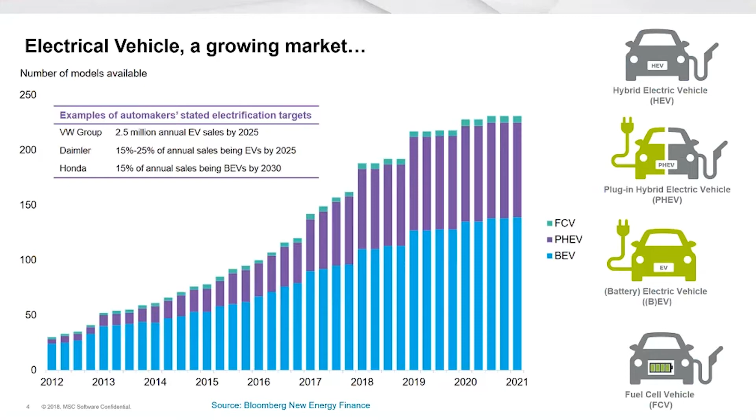Since 2012, the electrical vehicle market is a growing one. Different electrical vehicle technologies are present, from hybrid electric vehicles (HEV) to fuel cell vehicles (FCV). But according to projections, BEV and PHEV will be the dominant technologies in the coming years.

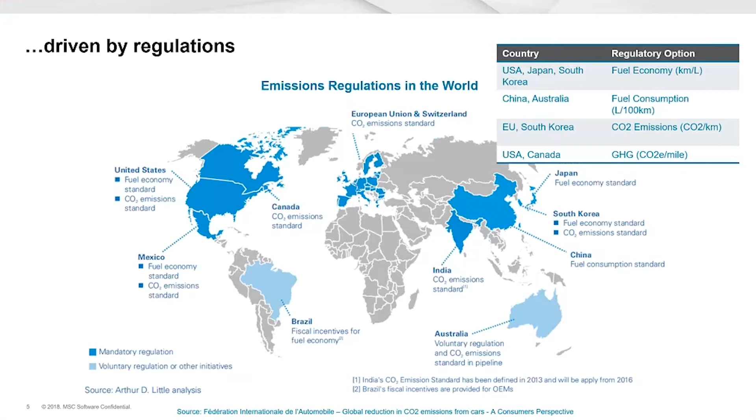This growth is actually driven by regulations. All major automotive markets in the world have emissions regulations in place. These regulations are diverse depending on the country, but all aim at reducing CO2 emissions and improving fuel economy. For instance, looking at the European CO2 Regulation, 2020 will mark the entrance of a new CO2 regulation, and the target will be joined by an excess emission premium for manufacturers failing to meet it.

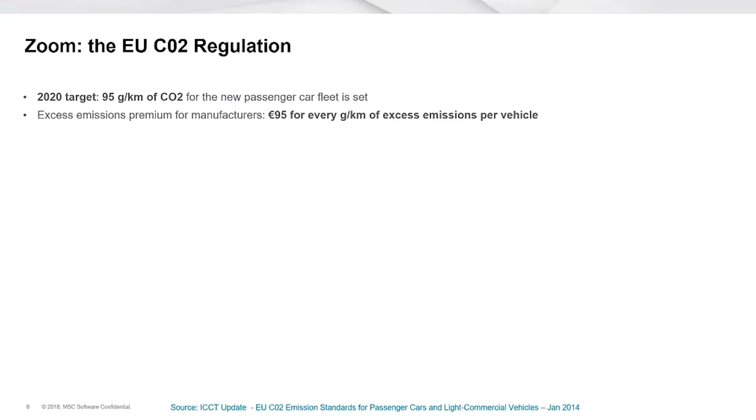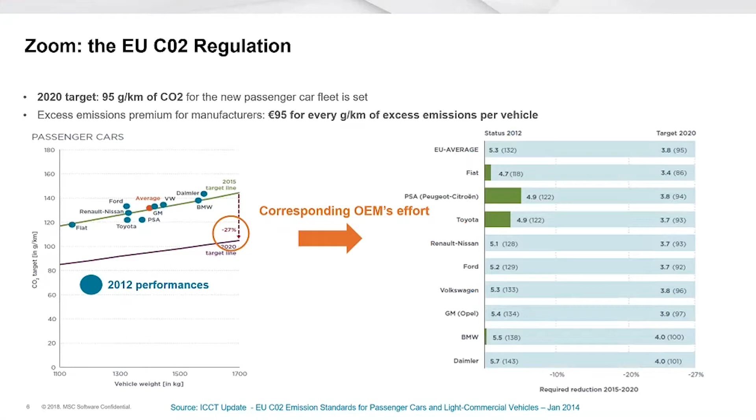Looking at the different emissions performances, the 2020 regulation is asking for a 27% emissions reduction from all OEMs. This will lead to more or less significant efforts for each of them. In order to achieve this reduction, electrification is needed, explaining the electrical vehicle growth we previously saw.

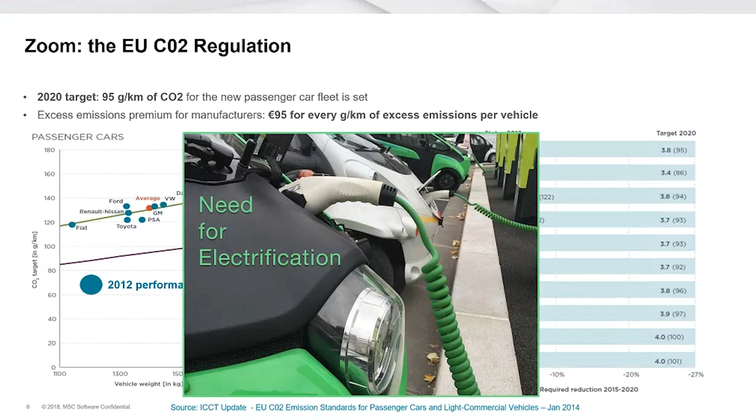But the question now is, what are the NVH challenges related to this growth? To understand that, let's look at the total interior noise of an internal combustion engine.

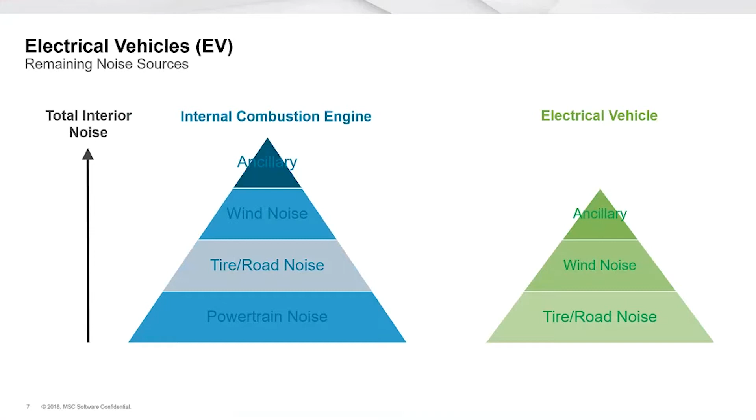We know it's the sum of powertrain noise, tire and road noise, wind noise, and auxiliary devices noise. Now, if we look at electrical vehicle noise sources, the removal of the powertrain noise will, by definition, reduce the amount of noise sources, and as a consequence, make electrical vehicles quieter.

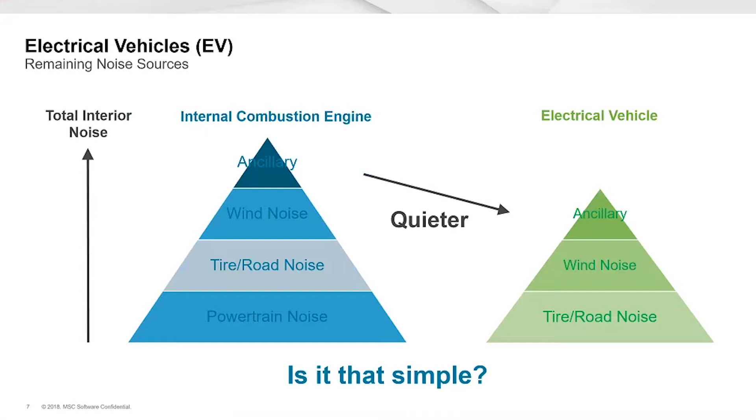But is it that simple? Can we, as NVH engineers, rely on this simple statement? The answer is no. Despite the removal of one of the main noise sources in cars, there are numerous remaining NVH challenges to tackle.

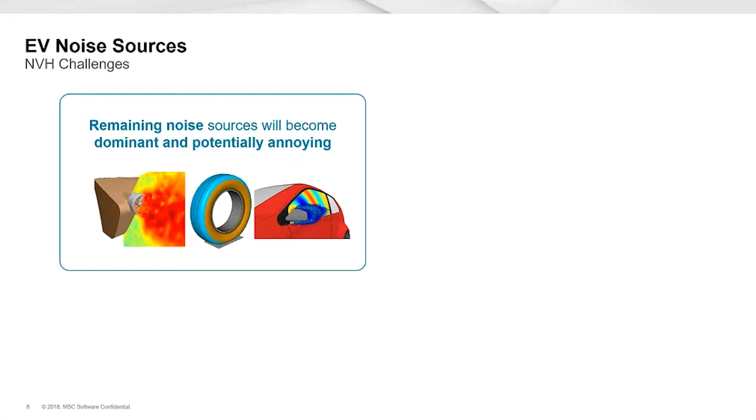The very first one concerns the remaining noise sources that are no longer hidden and dominant, and that will potentially annoy the driver experience. We must also add the electric powertrain noise that needs to be considered.

Usually, EV vehicles are perceived as high-tech vehicles, increasing passengers' sound quality expectations. And finally, if we look at exterior noise, having a total noise level that is decreased can impact pedestrian security, making electrical cars a potential threat.

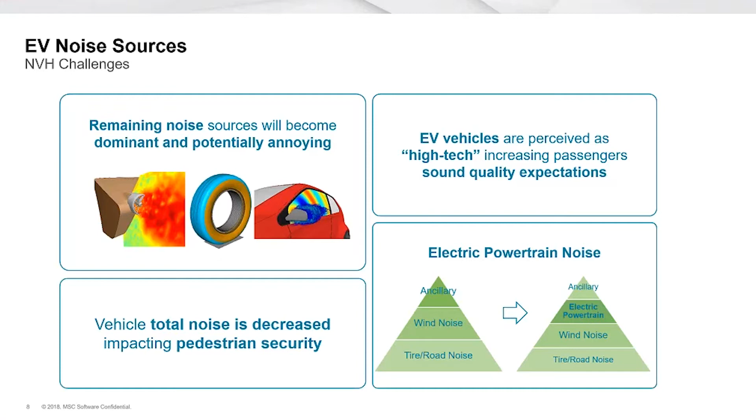This creates a varied and complex landscape that NVH engineers have to tackle. Generally speaking, we can consider two ways of dealing with NVH issues. When customers complain about noise, engineers have to work as surgeons and quickly fix the problem on an existing product. Of course, avoiding the acoustic issue beforehand would be better, and this is an advantage of integrating NVH analysis during the development process.

In this way, simulation can offer solutions with obvious advantages. We can know the noise level before prototyping. We can easily integrate results from other calculations in our simulation. And in the end, we better understand the physical phenomena.

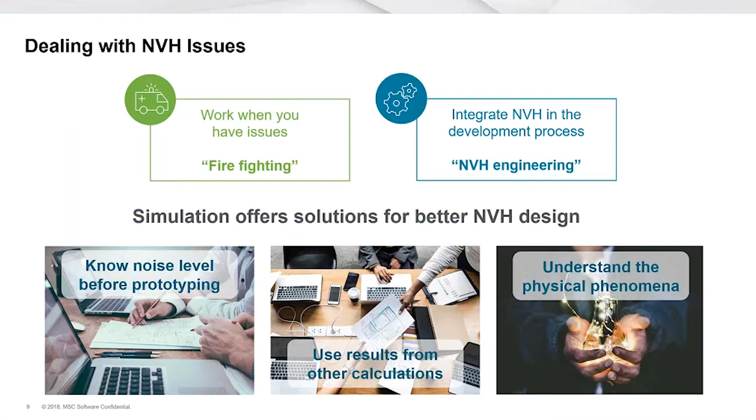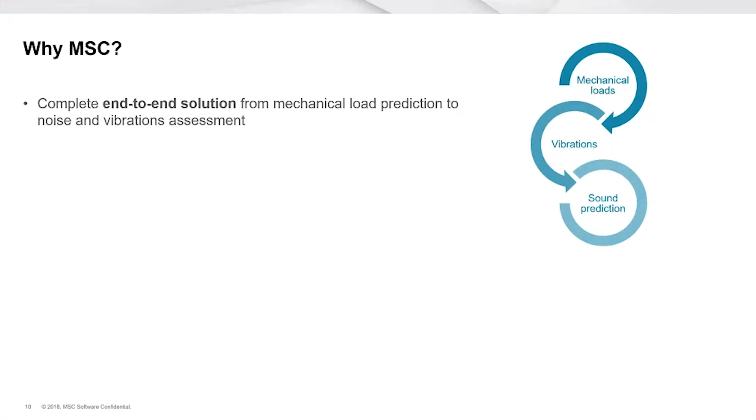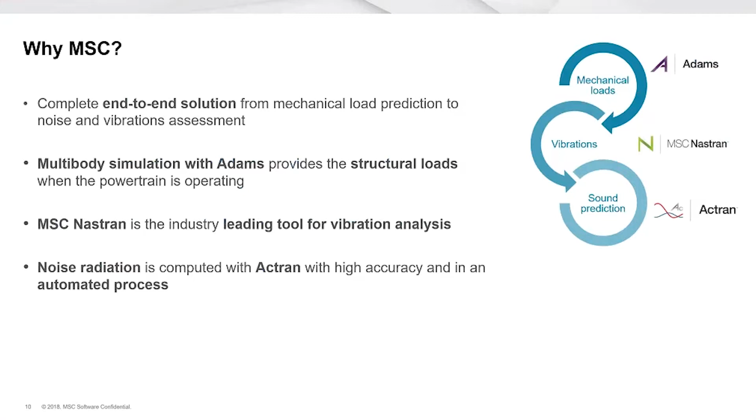Actually, MSC Software provides a complete end-to-end solution to address these problems. Multi-body simulation with ADAMS can provide you with the structural loads when the powertrain is operating. MSC Nastran is the industry-leading tool for vibration analysis, and Actran can accurately and efficiently compute the noise radiation. Finally, electromagnetic simulation results from various software can be easily integrated with MSC tools for electric motor noise prediction.

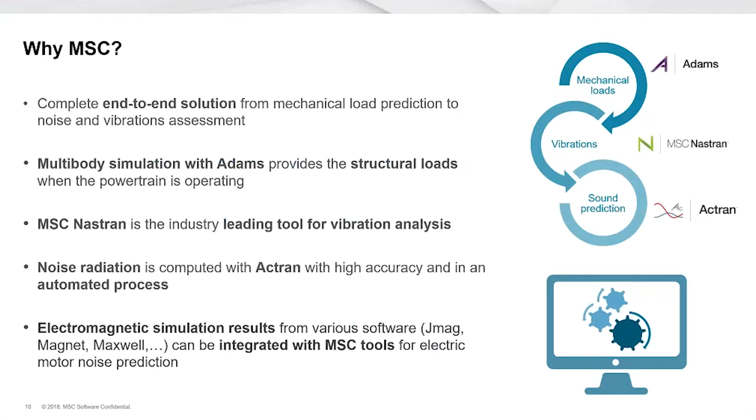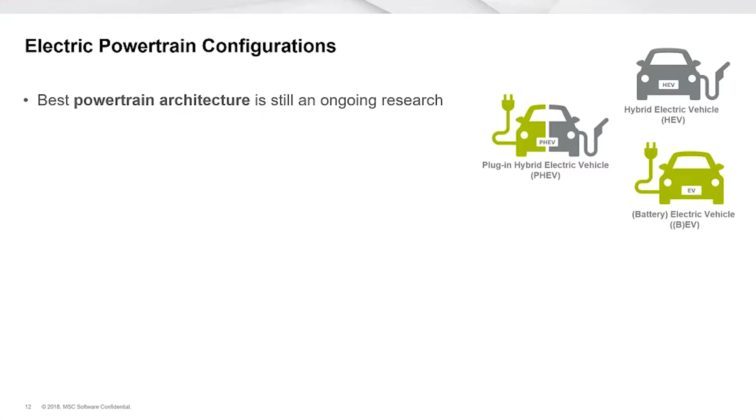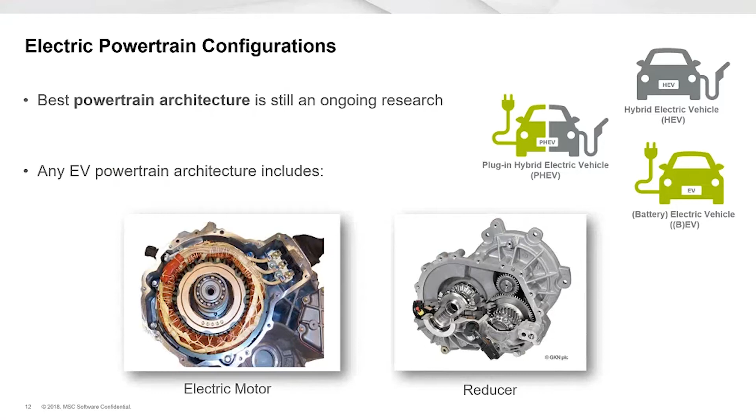Now let's better understand how the MSC software solutions can be used for electric powertrain noise simulation. There are different technologies for electrical powertrains, but whatever the architecture, any electrical vehicle powertrain includes an electric motor and a reducer. The gear reducer and transmission noise can be efficiently studied using MSC Nastran, ADAMS, and Actran, while electric motor noise can be studied using MSC Nastran and Actran.

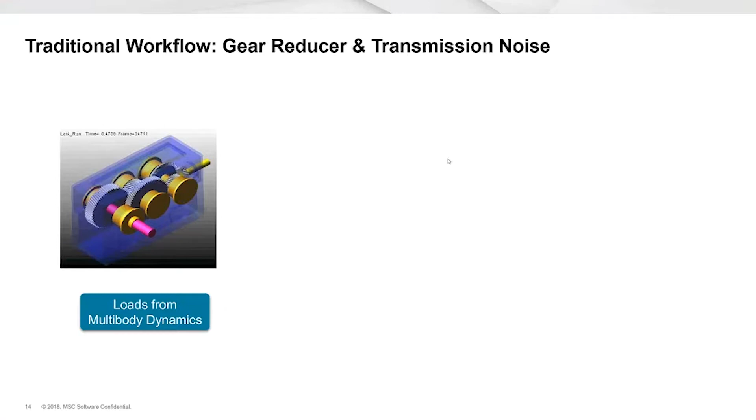First, you need some kind of tool to calculate the system loads generated by this mechanism. Secondly, you have to capture the surface vibration of the gearbox casing. After that, you will be able to perform an acoustic radiation analysis and produce the noise results, actually coming up with the sound of the actual mechanism once all three steps are completed.

The essence of gearbox noise can come from either gear rattle or gear whine. But both of them start from a gear mesh force, and we need to be able to capture how that force can be transmitted through, for example, the bearing force, all the way through the body vibration in order to generate the acoustic radiation.

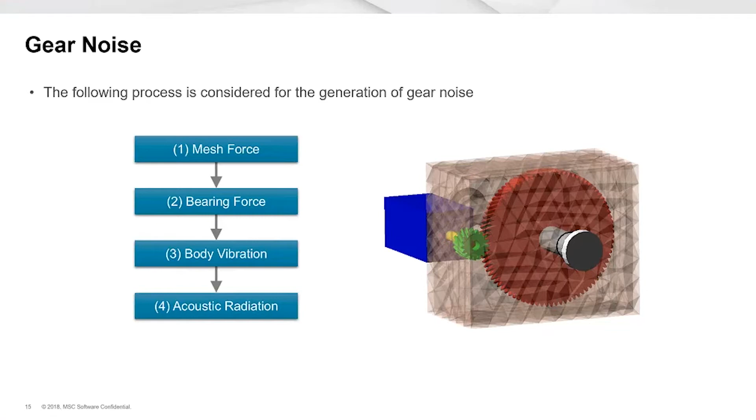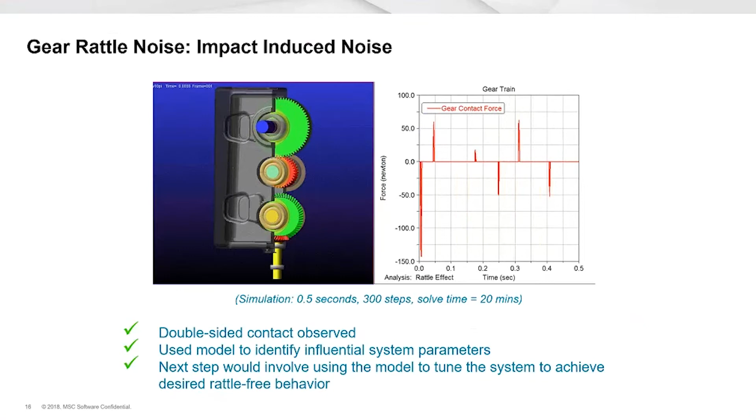For capturing both gear rattle and gear whine, we have different applications. For gear rattle noise, it's more of an impact-induced noise, so you need to be able to accurately incorporate the 3D geometry and how the different gear pairs are contacting each other. With the traditional Adams machinery 3D contact gear, you will be able to incorporate the gear rattle into your system level analysis.

For the gear whine, we're also coming up with a gear tooth deformation prediction tool, which allows you to account for the flexibility of the gear tooth. When you can capture realistic gear tooth flexibility, you can capture some of the deformation and vibration caused by the gear tooth deformation. That's very important when predicting gear whine noise. In this technology, an FEM model is created and solved in the background to help define the tooth compliance, so Nastran is embedded into this technology when analyzing gear tooth deformation.

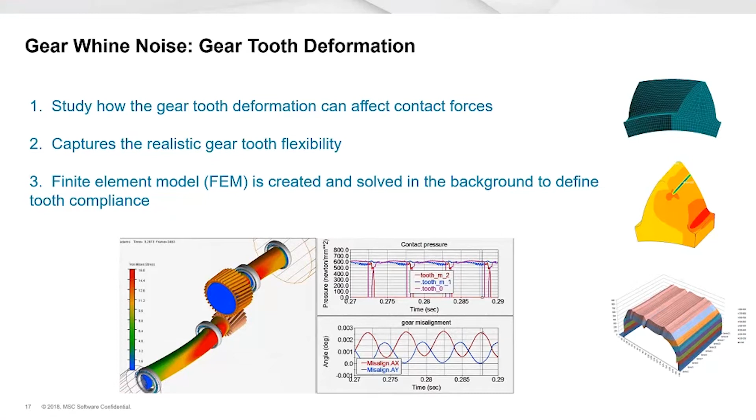As we talked about before, you need to capture three steps of the physics: the loads, the surface vibration, and the acoustics. The traditional way is to do those separately. When you generate the loads from, for example, a multi-body system like Adams, you import those loads into an FEA software like Nastran. Then you calculate the surface vibration, and after that, you provide the surface vibration results into an acoustic tool like Actran to do the acoustic radiation analysis. That's the traditional process.

Recently, we've invented a more integrated workflow that's more user-friendly for MBD engineers, meaning both the surface vibration and acoustic analysis can be performed inside the Adams environment, so you don't need to leave your familiar MBD environment. This is very convenient for any system engineer or multi-body dynamics engineer who wants to understand preliminary results for acoustics without leaving the MBD environment. And if you want advanced post-processing, you can take the results generated from this simulation and post-process them in a more sophisticated acoustic environment like Actran VI.

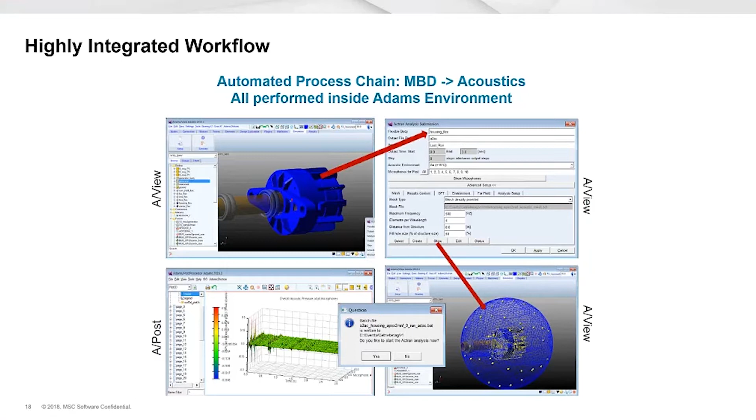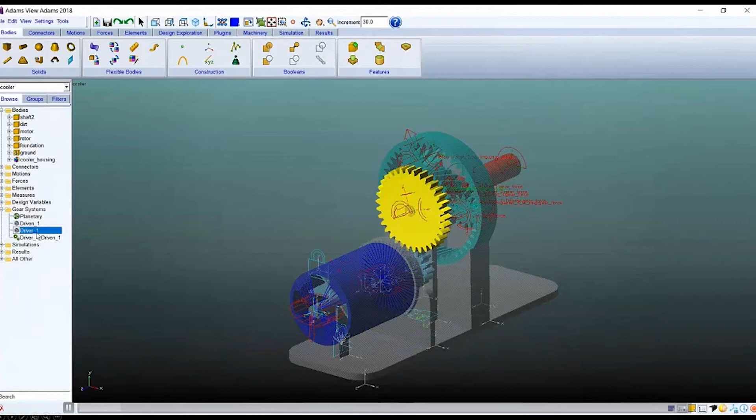The model we're using is a fairly simple cooler system, a very traditional Adams model. You have the cooler housing as the flexible body, and also some gear systems, a planetary gear and gear pairs. Now let's perform a simulation with only the multi-body dynamics simulation.

We have one flexible body and some gear pairs, and later we want to analyze the acoustic radiation coming from this motor casing here.

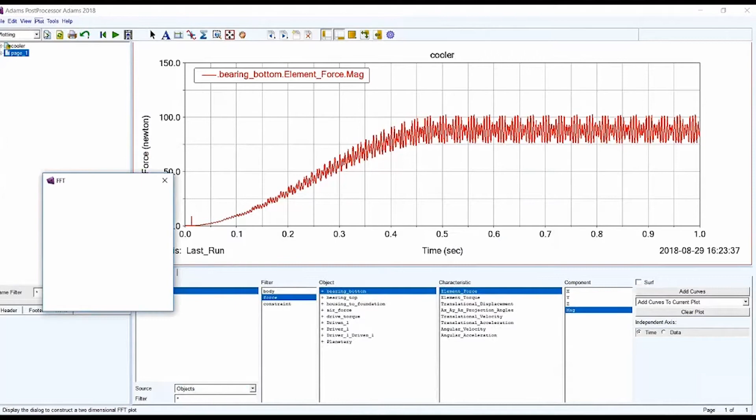After we're done, let's do some simple analysis with the bearing force, and perform an FFT transformation to study the frequency domain results. All of this is performed using pure Adams and MBD results. Acoustics are not involved at this point.

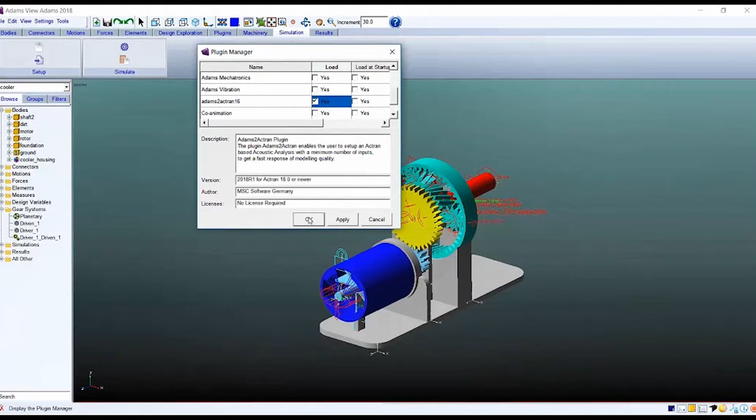Now let's load the actual toolkit we're developing, called the Adams to Actran toolkit. Go to the plugin manager and load that new plugin toolkit, and when you have that, go to the Actran analysis submission.

Then you can choose the flexible body you want, which is the housing of that motor. Then you can define, during that 1 second of MBD simulation, what time period to use for performing the acoustic analysis.

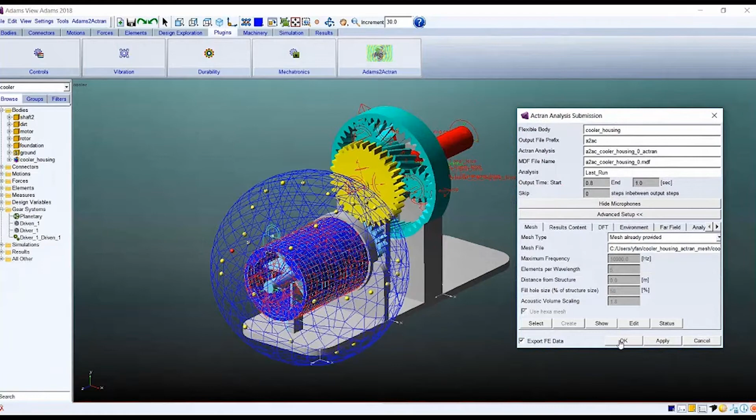Then you can define the mesh along with some other properties, and you can also create the acoustic mesh within the Adams environment, because in the background we are using Actran technology to help with the pre-processing. Also, when you start running the simulation, Actran runs in the background to help calculate those results. So when you click OK, you're done with the setup, and the acoustic simulation will start running in the background.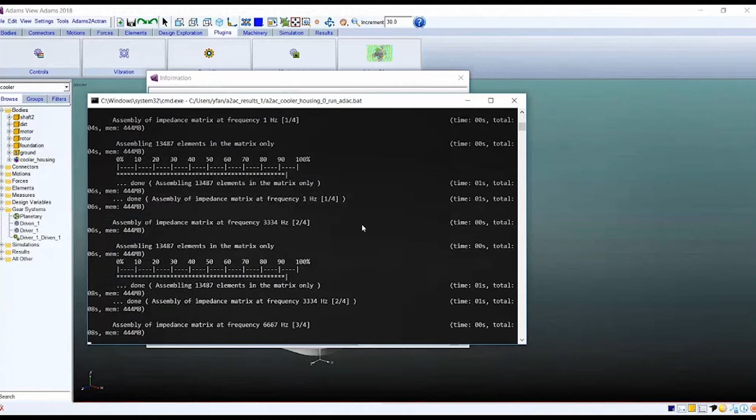Again, you're not leaving your familiar MBD environment. Everything is performed within this Adams interface. It takes, for this simulation, about 5 to 10 minutes to finish.

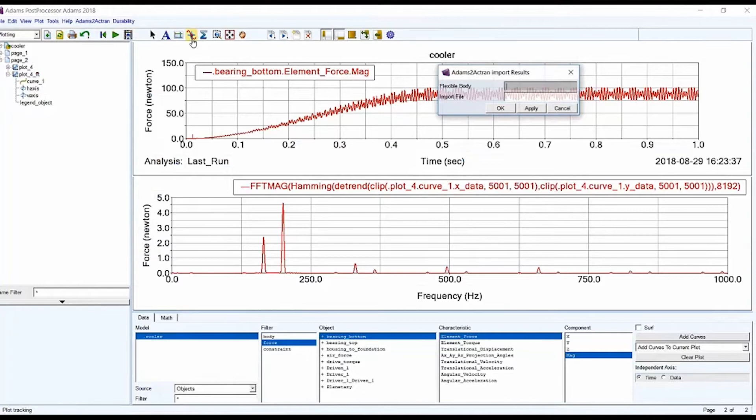When you're done with the simulation, you can go to the post-processor and load the acoustic results. You will be able to import the acoustic file directly into your Adams post-processor.

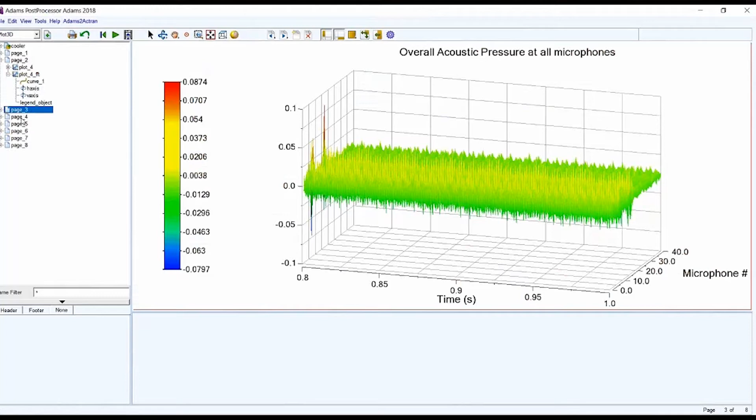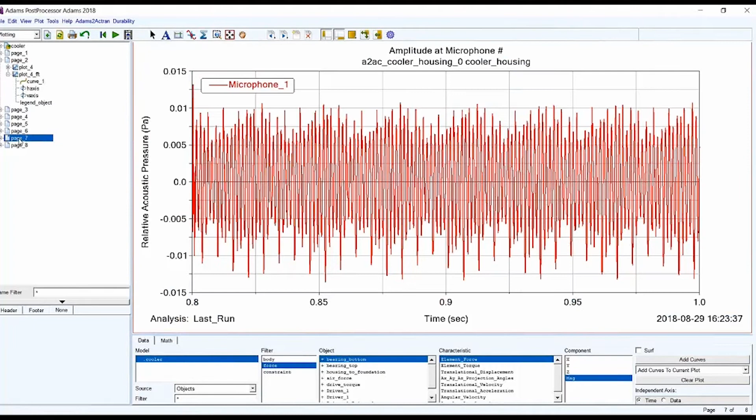For that, you will get some acoustic analysis parameters. For example, what is the overall acoustic pressure at all microphones, the sound pressure level at a certain microphone. You can also get some other preliminary acoustic results. In the latest toolkit, we're actually enabling you to not only get the time domain results, but also the frequency domain results, like waterfall charts and things like that.

So at this stage, if you're not happy or if you want to do some comparison, you can always go back to your mechanism. For example, you can change your gear configuration, the gear tooth number or tip relief, some of those parameters that you want to modify. Then you can perform another acoustic analysis in the Adams environment and compare the acoustic results, and see whether or not those changes are good or bad for your final design.

So this is a very simple explanation of the toolkit we have that enables you to perform acoustic analysis, for example for mechanisms like gear reducer or gearbox, all inside the multi-body dynamics interface.

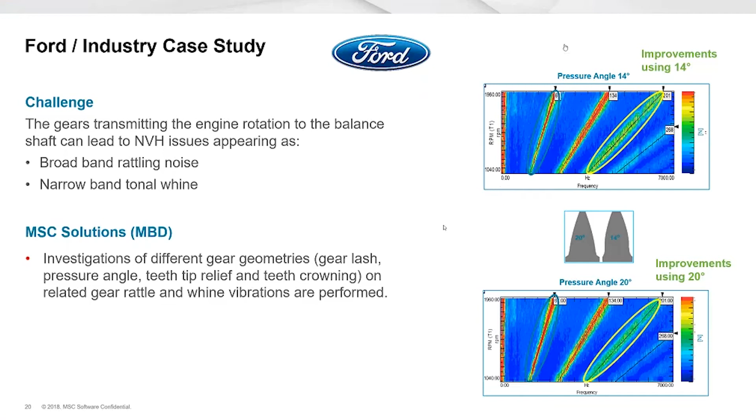So they used the Adams results, the vibration of the engine computed directly within Adams, to perform an acoustic radiation analysis. Thanks to this easy interface between Adams and Actran, they could easily generate acoustic radiation results, but not only charts, but also listen to what would be the impact and the changes on the gear level, on the noise recorded at several microphones, so that they could listen to the impact of those changes and easily assess if whine or rattle noise was present. That was a very nice study made by Ford.

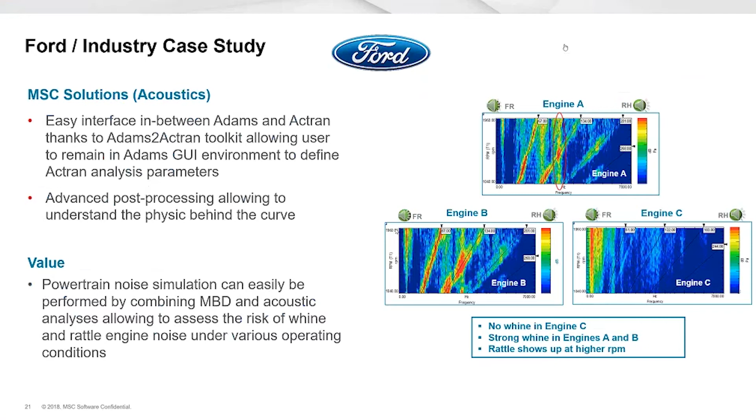Having reviewed the gear reducer noise and the MSC solutions we have for that, I suggest that we move to the electric motor noise prediction and understand how you could leverage MSC solutions to handle these problematics.

Actually, when we look at electric motor noise, the primary noise radiator is actually the stator frame. So when we do have electromagnetic forces applied on the stator frame while the engine is operating, if the frequency of these radial forces on the stator teeth is close to or equal to any of the natural frequencies of the stator frame, we might have a resonance that will occur. This resonance can lead to deformation of the stator frame and the surrounding housing, which at the end can induce acoustic radiation.

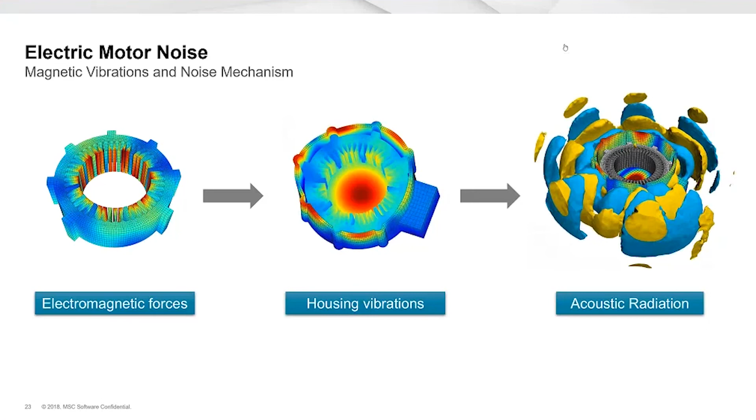So in order to study this particular phenomenon, you have two possible workflows using MSC solutions. The first one is what we call the fully coupled solution, where both the fluid, the air surrounding the engine, and the structure are modeled within Actran. Another possible workflow is what we call the weakly coupled solution, where Actran takes care of the acoustic radiation only, and the structural analysis can be performed with MSC Nastran, for instance.

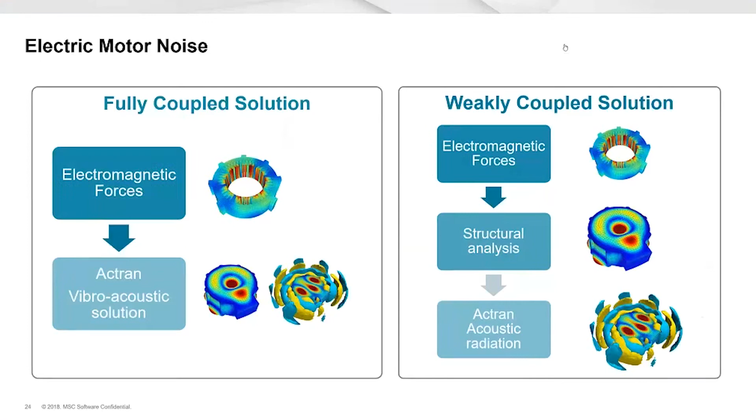At this stage, I would like to mention a case study from our collaboration with another company, Renault this time.

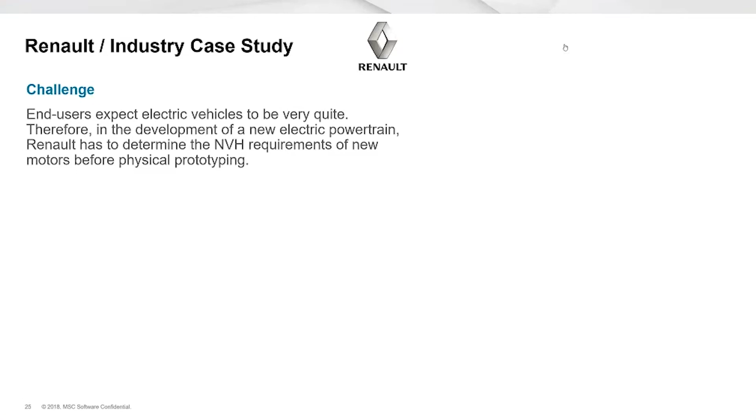As we mentioned in the introduction, one of the challenges in EV development is the absence of an internal combustion engine, which can expose other noise sources to the driver. Therefore, during the development of a new electric powertrain, Renault wants to determine the NVH requirements of new motors before actual physical prototyping.

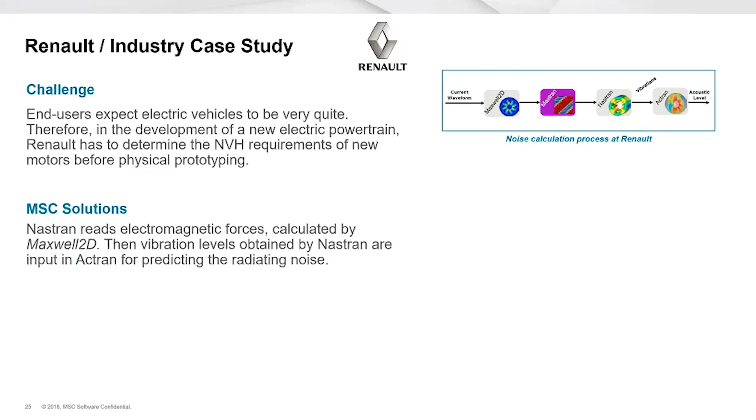The solution they used was to read electromagnetic forces calculated by Maxwell 2D into Nastran. Then Nastran performed the vibration analysis, and based on the vibration levels computed by Nastran, acoustic radiation was performed inside Actran in order to predict the noise radiation.

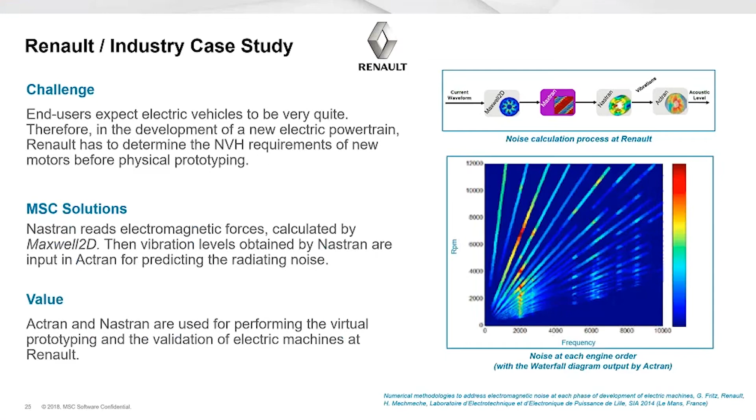Now I would like to guide you through a live demo of an acoustic radiation analysis setup in Actran. So I will move to Actran VI. Before actually setting up the analysis, I will introduce you to the case we will study together.

The model we use for this demo is a 2004 Prius motor. At least, we used its geometrical information to build a simplified model, and we applied a simple sine function on the teeth of the stator to create our excitation.

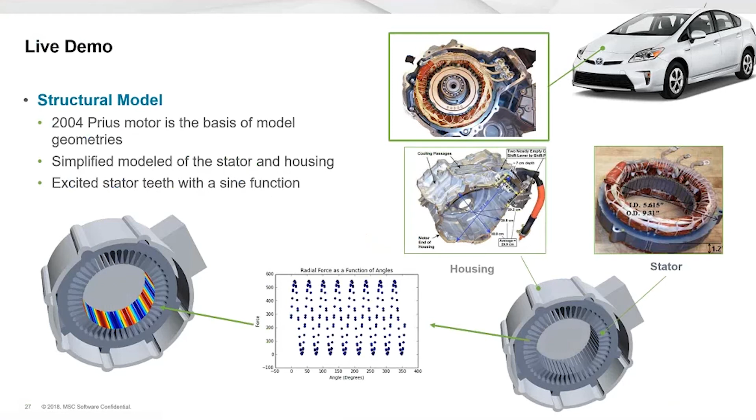We will use a weakly coupled solution to analyze the acoustic radiation of this electric motor. Because of that, we need to first get the structural results in order to move into Actran and perform the acoustic radiation analysis.

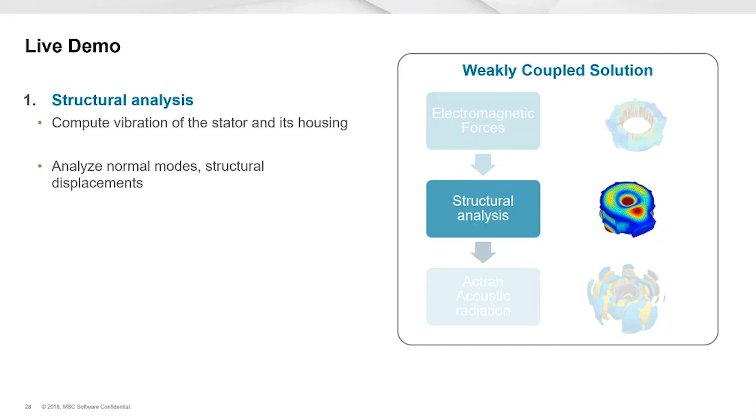So, in addition to the structural deformation computed when we apply a sine function to the stator, we can also look at the structural modes, because we know that they will ultimately drive the structural deformation.

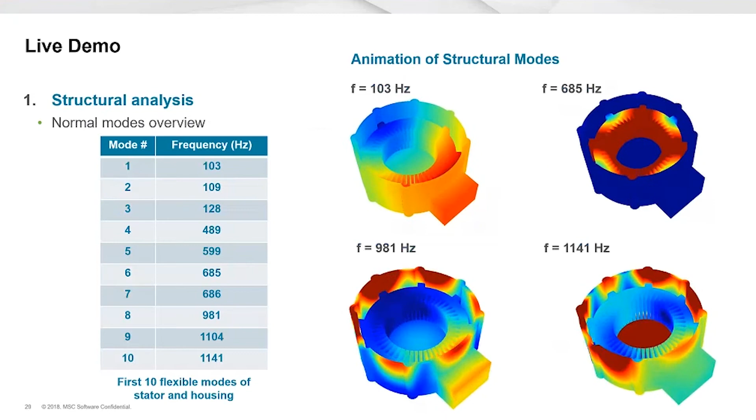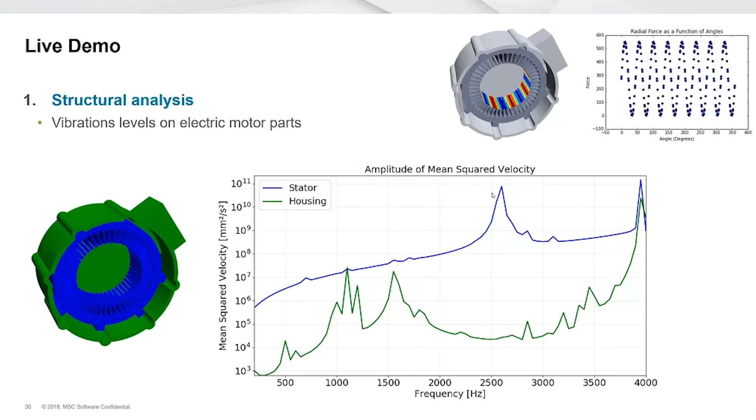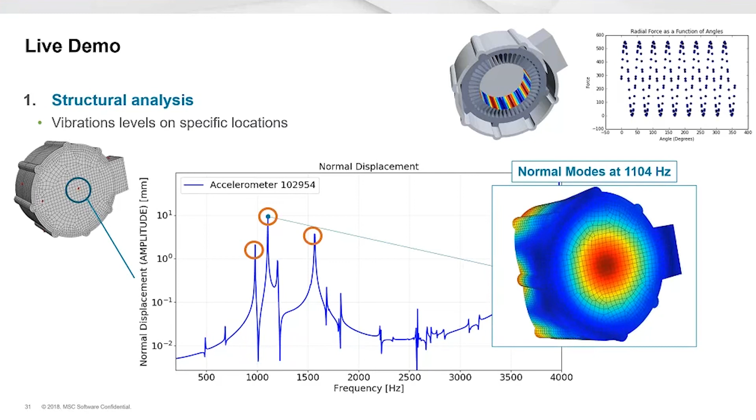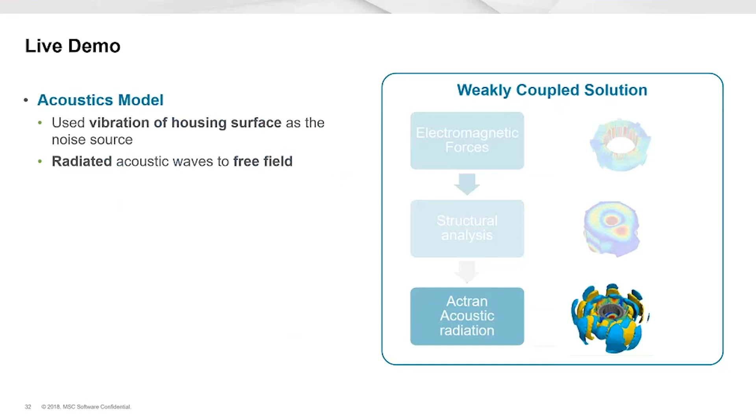So, having the structural displacement information, we can move to the acoustic radiation analysis. What's really interesting is that since Actran 18, we have developed a dedicated wizard for acoustic radiation analysis that really allows the user to easily set up their model through a step-by-step approach.

So I will now get back to Actran VI, and in order to open the wizard, I will go to the wizard menu, select the acoustic radiation wizard, and select the frequency acoustic radiation wizard, as we will perform a frequency acoustic radiation analysis.

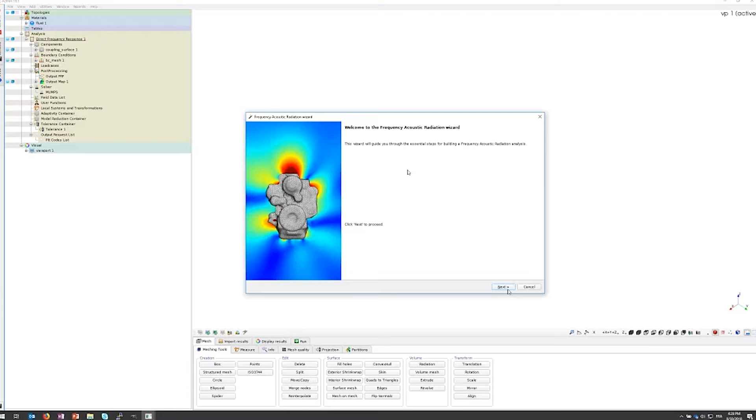When you do that, a window welcomes you to the acoustic radiation wizard. To start building your analysis, you simply click Next. We clearly and directly see on the left-hand side of the window what the steps required to define our model will be.

We'll first select the structural model we want to use - that is, the structural results we want to use for the acoustic radiation analysis. We will then select the analysis parameters and move on to the acoustic model definition, to define the acoustic environment surrounding the radiating structure. Then the coupling parameters will trigger the projection of structural results onto the acoustic model. Finally, we define the output we want at the end of our computation.

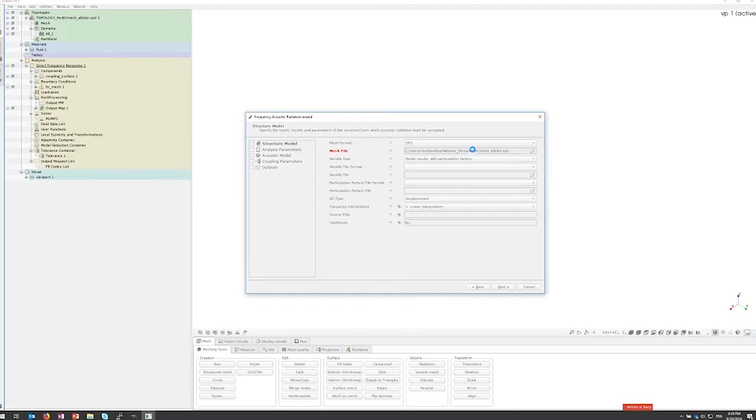But I will start with the structural model. In this example, my mesh is stored in an OP2 file, so I will go and select my OP2 mesh. The mesh is directly loaded inside Actran VI in the background.

The results I have are vibration patterns for a defined set of frequencies, and those results are stored within the same OP2 file coming from Nastran, so I'm selecting this OP2 file. For the rest of the parameters, I can keep the default values because I have stored displacement results, and I can directly move to the analysis parameters.

In this second step, we need to define the frequencies we want to use for our acoustic radiation. In my case, I will use the same frequencies that were used for the structural analysis, so the frequencies will be imported from a file - once again, our OP2 file.

So once this is done, we can move to the acoustic model definition. We have several strategies that we can use, and the one we will use today is to create our acoustic mesh surrounding the structure using the ActranVI meshing tools.

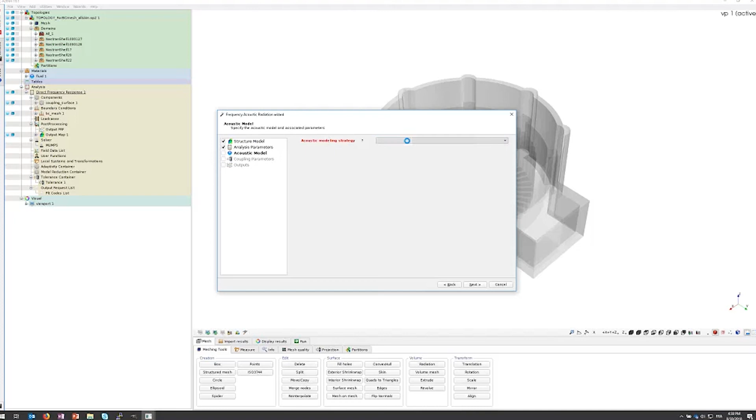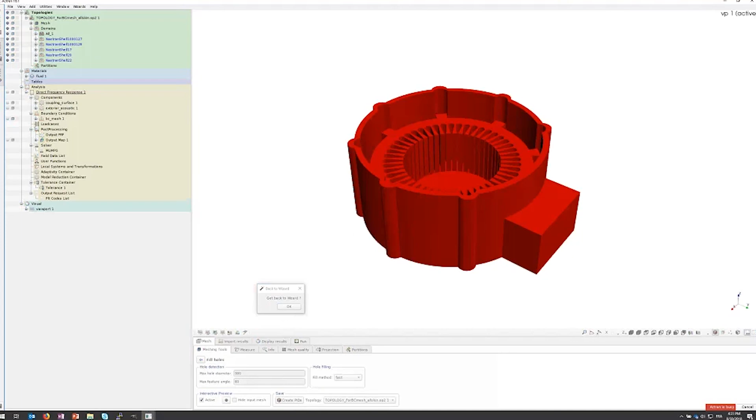So I select this strategy, and the first thing we need to do is fill the holes of the structure, as we can see it's not closed. So I select the structure, quickly fill the holes, so we can preview what the filling function results will be. If you are happy with that, you can create this mesh and come directly back to the wizard.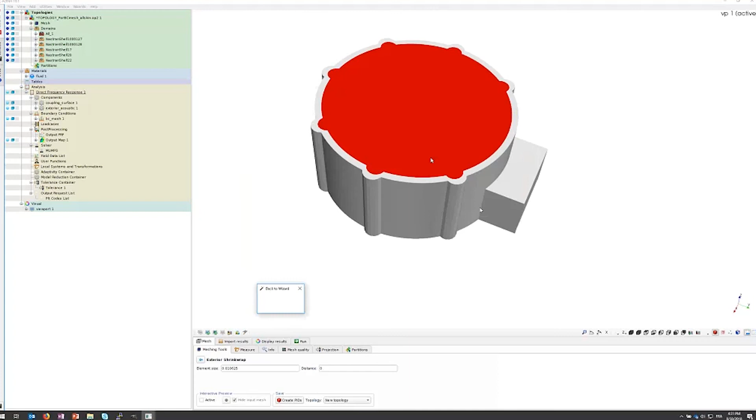Now that we've closed our structure, we will create a shrink wrap, a 2D mesh surrounding this structure mesh. So I'm selecting all the structure mesh and I will create a wrap around it. Once again, I can preview the result of my shrink wrap parameters that are in blue now, and if you are satisfied, you can create and go back directly to the wizard.

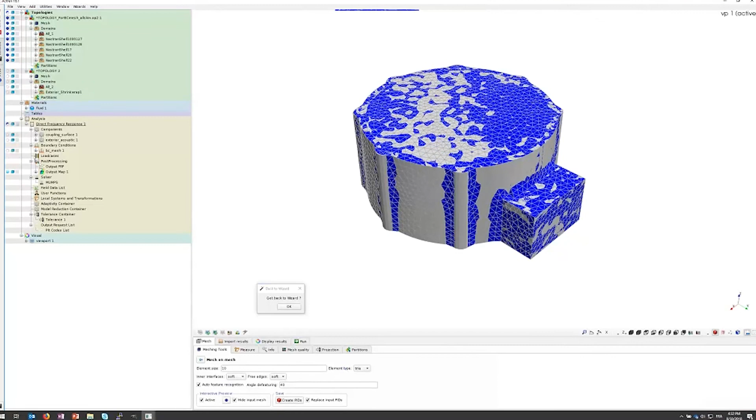Because the first wrap might be a little rough, I will smooth this mesh by remeshing it, thanks to the mesh-on-mesh option of ActranVI, and now we have something really smooth that looks great for our analysis. So I'm happy with that. I click on create and go back to the wizard.

I will define the parameters for the fluid surrounding the structure, so the sound speed and fluid density, and I will keep the default values. The next parameter is the thickness that will drive the volume thickness surrounding my structure.

What is really nice is that this is the only parameter you need to define, because the acoustic mesh surrounding the structure is created automatically by the solver during computation, so the mesh is adapted to the frequency you want to analyze, giving you the best performance in terms of acoustic radiation. So I will define a certain thickness, in my case 10 centimeters of fluid around, and I can move to the coupling parameters.

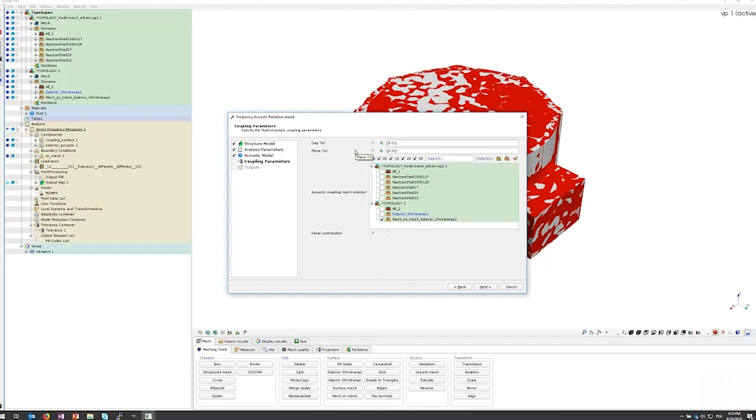Here we are defining how structural results are projected to the acoustic mesh for the acoustic radiation analysis. In this case, all default parameters are fine. The structure is selected, the acoustic mesh is already selected for you, and you can directly move to the output definition.

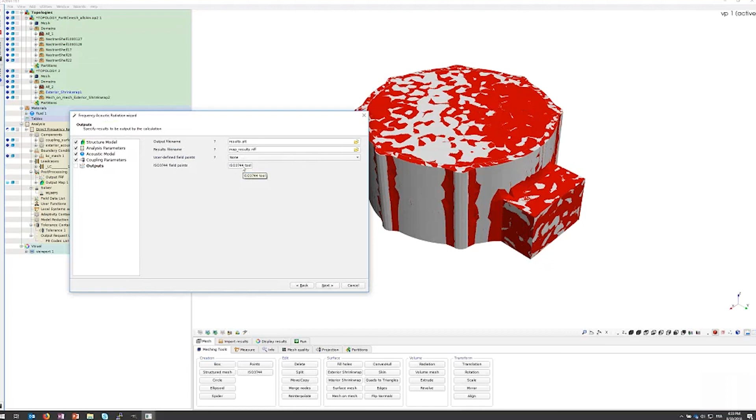In terms of outputs, we will generate a map that will allow you to look at the acoustic radiation. What I will do in addition is create a set of microphones around the motor using the ISO 3744 tool embedded inside ActranVI.

So I can give some parameters. Once again, I have a preview of where my microphones will be located, and if you are satisfied with that, you can click on create. You go back to your wizard, and you see in the background that the different microphones have been created, and we are done.

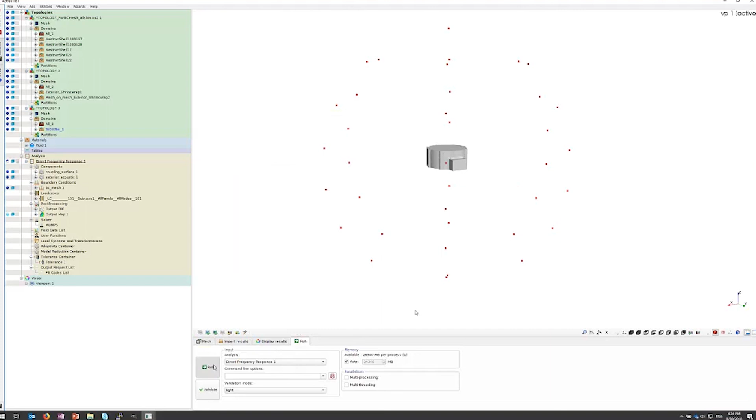So this is complete. The wizard tells you that the analysis setup is complete, and you now have an analysis ready to run. You can select Open Run tab, finish. The Run tab opens at the bottom of the graphical user interface, and you click Run, and the run will be launched, and you just need to wait to get the results.

This computation takes around five minutes, so I will directly move to the post-processing of the results.

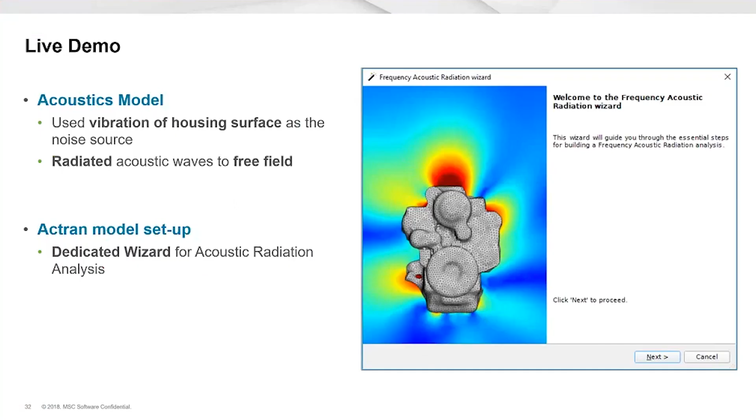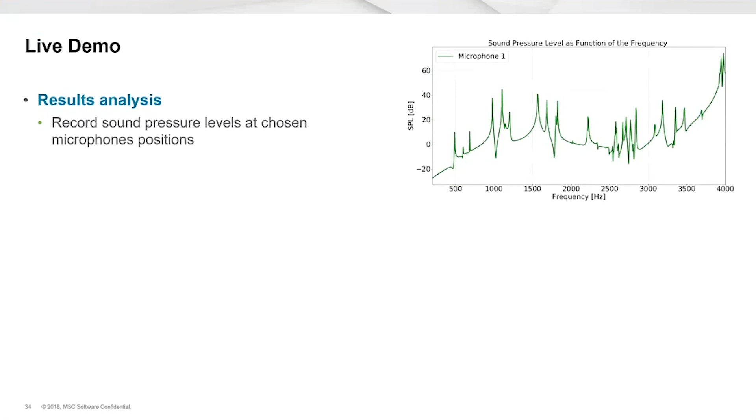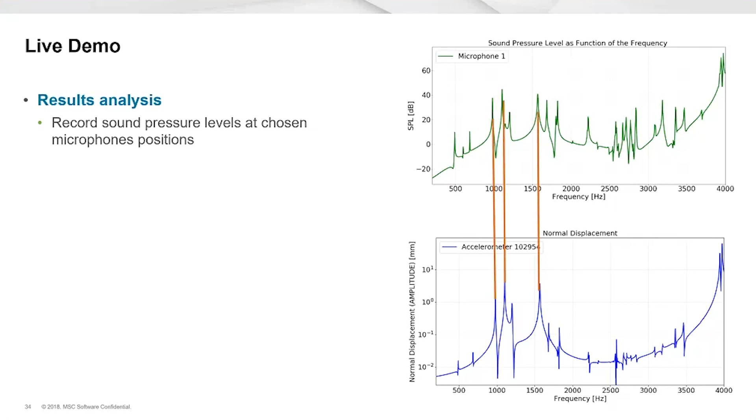In terms of results, we have defined some microphones around the engine, so we can look at the sound pressure level as a function of frequency for each of them, and also take back our structural analysis results to make a parallel between peaks we see in the sound pressure level curve and the vibration information we got. We can also look at sound pressure maps and isolate problematic frequencies and structural parts to understand where we need to work to reduce sound radiation at some frequency.

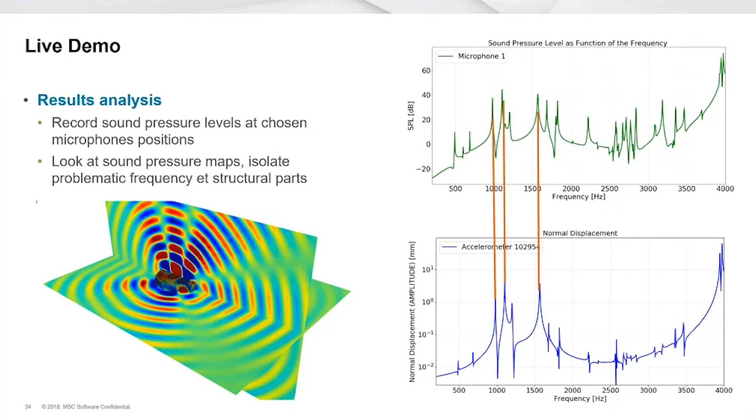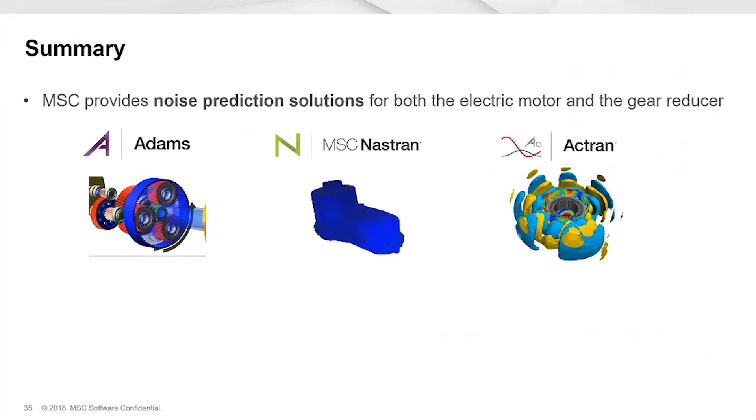So this is what I wanted to show you today in terms of live demonstration. At this stage, what I would like to say in summary is that MSC really provides you with noise prediction solutions for both the electric motor and the gear reducer. But in addition to these solutions, MSC offers you both the technologies and the professional services that can really help you solve your industry challenges.